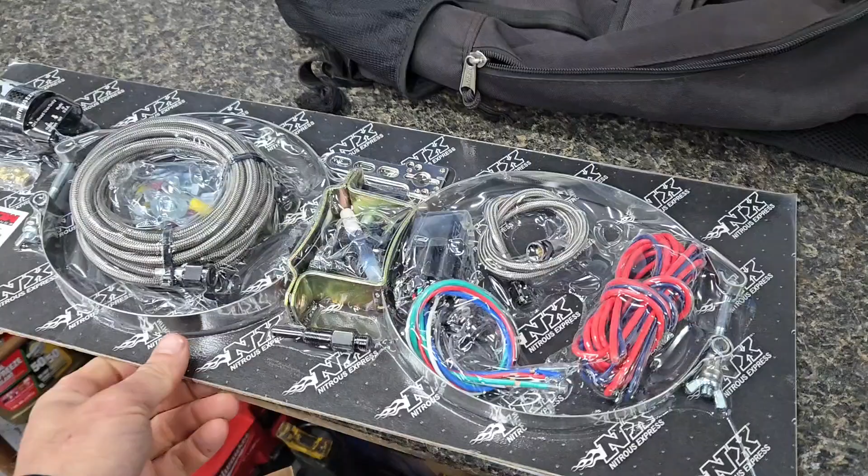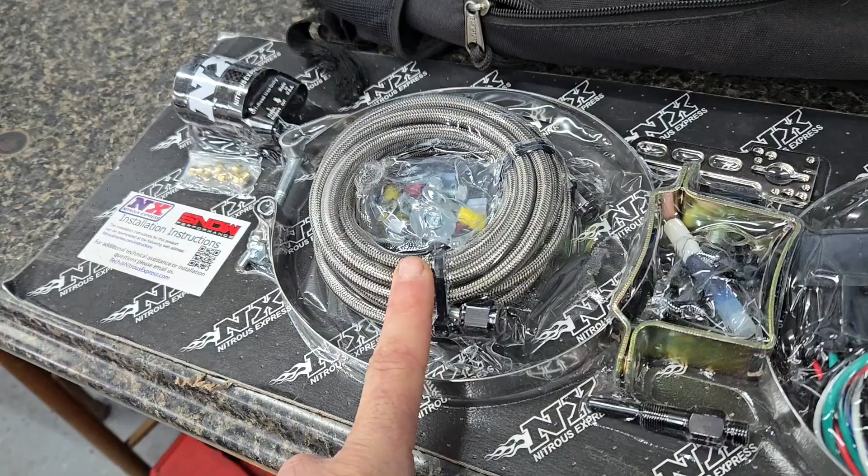All right, got ourselves a little kitty in here. Pretty basic stuff, single nozzle. Hopefully this line is long enough to go to the back of the wagon. We got our jets, nice solenoid here. Ooh, got the billet handle on the bottle. 10-pound bottle, nothing too buck wild.

I wonder if they send these full. Honestly, I don't know. We can crack it open, I guess. I don't think they would send that full, I think it would probably be a hazard. Woo! All right, well, ooh. That's right, all right.

So we got the kit all opened up, and I'm going to go over everything that we are about to do. So we got our line, actually got an arming switch, which I believe this is the wiring for. We got our line from the solenoid to the nozzle. There's our nozzle, and we got our jets.

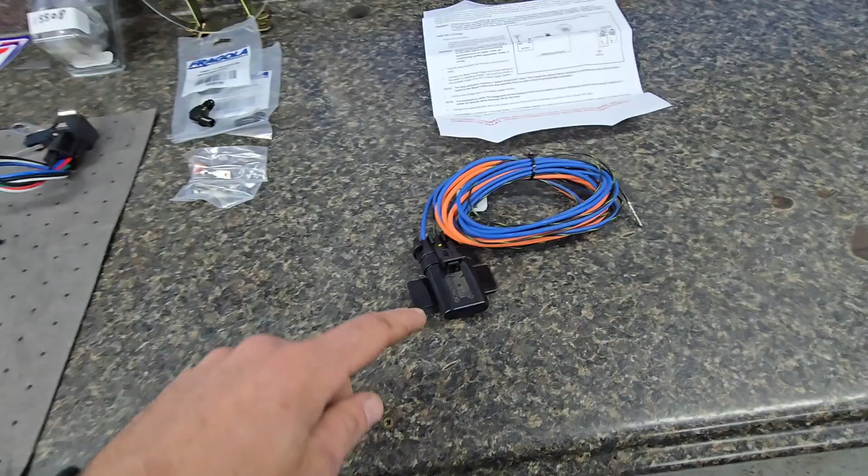So it came with a wide open switch, a bracket for the wide open switch, and then a regular relay. But we are not going to run that deal. What we are going to run is the NOS solid state relay, and that allows us to basically plug right into the Holley, and we can control all of this, everything through the Holley, which I'm actually pretty excited about. Should be pretty fun to do.

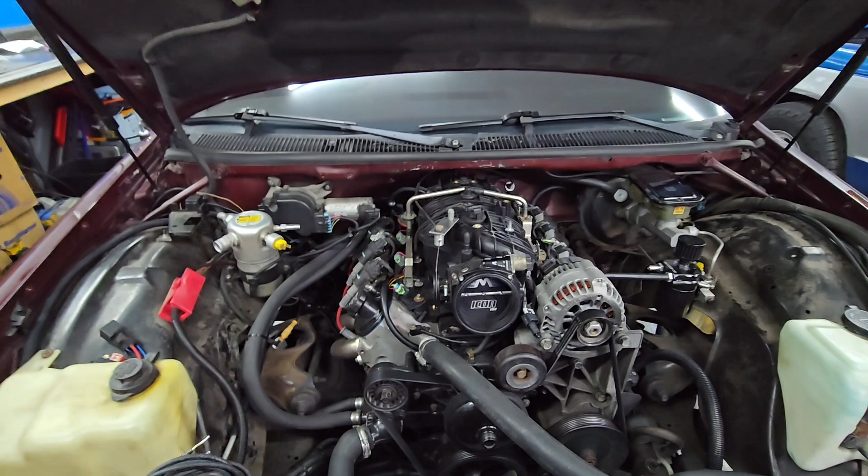So, man, we're going to get started. We need to figure out where we're going to put our solenoid. I was thinking to try to hide it and make it kind of incognito, but I think it's just going to go probably on the fuel rail or something.

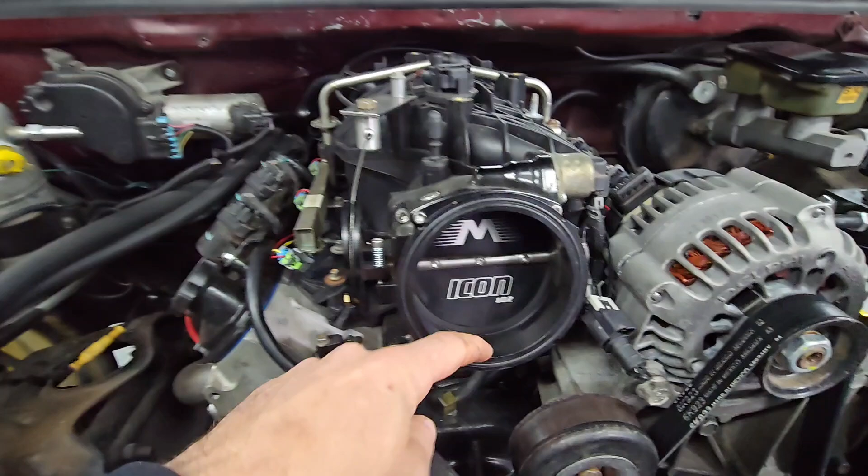Being lame, I do not have a cold air intake tube built yet, or air intake I guess, doesn't have to be cold. But so I think right now what I'm going to do is get real lazy. I'm going to drill a hole into this bolt-on throttle body adapter deal, because I don't think I'll ever need this. And if I do, I can just put a plug in it. But I'm going to drill a hole, tap it for 1/8-inch pipe, and then my nozzle should come underneath with a little stud sticking up, and it'll just spray directly into the throttle body.

So I'm going to mount this thing all up, just running some lines and wires, and it should be pretty easy.

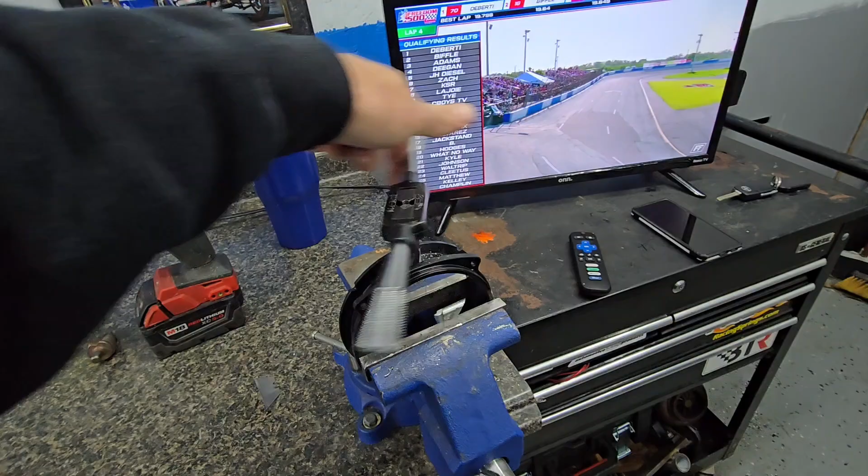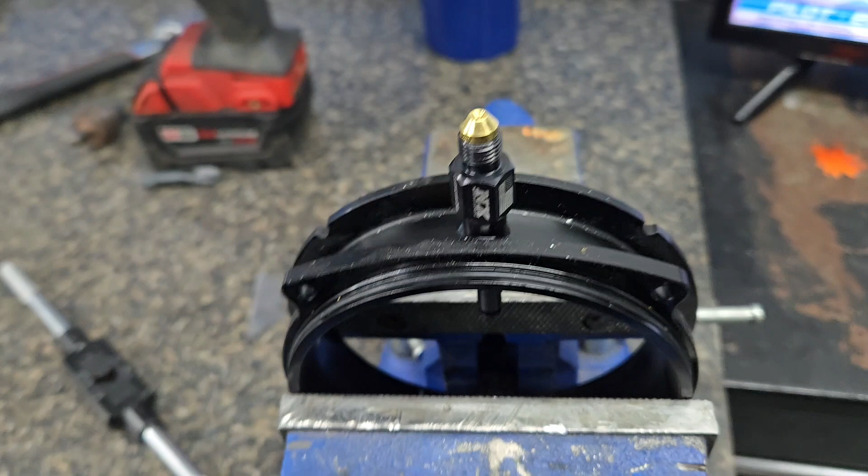And just like that, drilled and tapped the throttle body spacer deal, whatever you want to call that. And I've got the nozzle in there. It's pointing straight back into the throttle body. Let's see if you can see it. There you are. And we've decided to go with the 41 jet, which is a 75 shot for now.

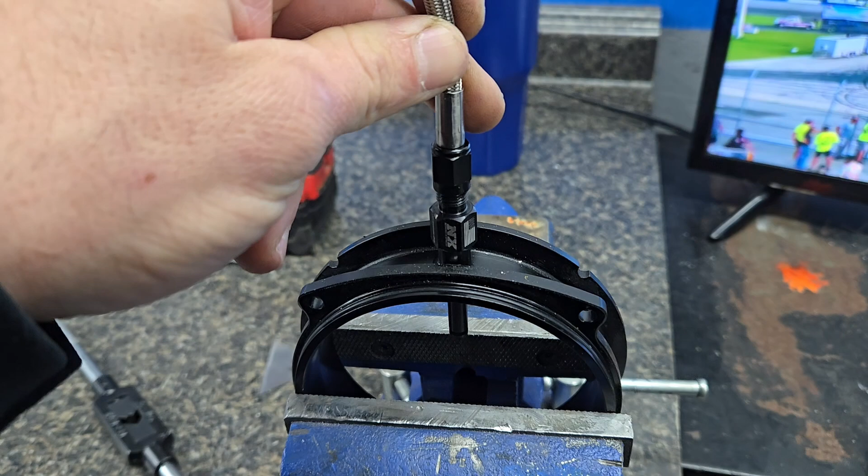I'm not going to get too buck wild on this thing, at least yet, but I just wanted a little something extra. So I'm going to go ahead and just put all this stuff together right now, and it'll be a little easier to do it here on the bench than trying to do it on the car. So I'm going to get this thing on here and put it together.

So it's the next morning after we put some nitrous on, and there's a local Cars and Coffee. She's looking pretty proper, some diesel bros. We felt it to be pretty fitting to park next to the police unit there. Look how good she's looking.

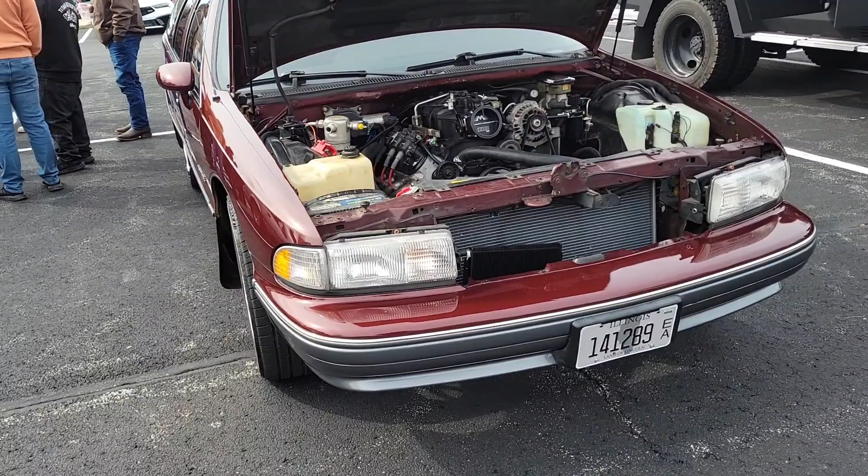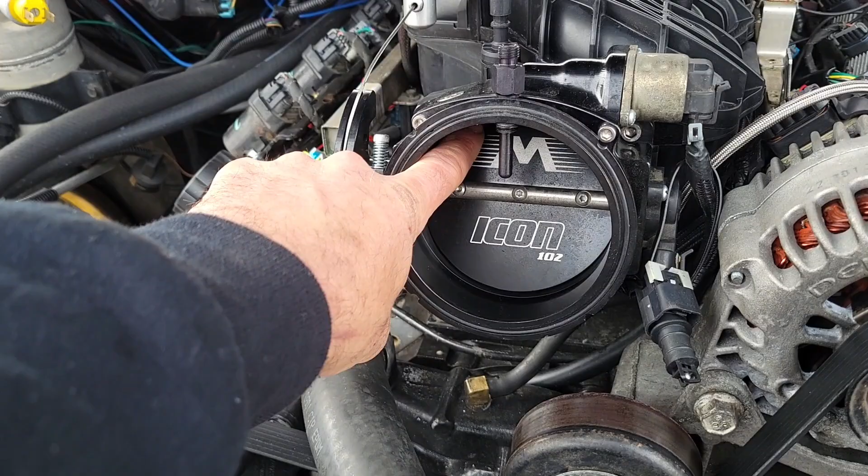So the nitrous kit's almost done. I need one more fitting. We put the nozzle in, and I had it underneath, and I had the line all hidden and everything, but then when I opened the throttle body, it hit the nozzle, so I had to move it. But anyway, it's almost done. Need a 90-degree fitting for the top of here. She's ready to rip. Spray this thing.

All right, so I put the throttle body spacer deal back on. The nozzle was supposed to come from the bottom and up, and it was at first, but then when I opened my throttle blade, it hit it. So I couldn't put it there. So all I did was take the 4 bolts, flip it upside down, bolt it back in. Now it comes from the top.

I had to go get a 90 for this because it stuck straight up into the sky, and we can't have that hitting the hood. So we got a 90 on that deal, which is probably going to be fine. I mean, this does look pretty clean-ish for now, but it was supposed to be all hidden, and this kind of messed things up a little bit.

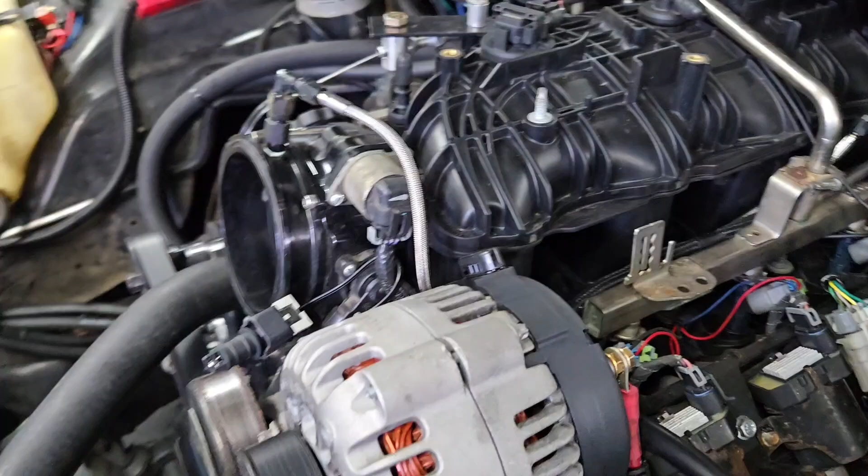No big deal. We do have the solenoid mounted, and right now it's completely lazy with the wires just going up and over the intake. I'm going to hide all that like I do everything else. The line dips down behind it, and then the feed line is somewhat tucked up there, so it's not real ugly. So the feed line is ran. These wires are very loosely ran until I get a little more time to clean it up.

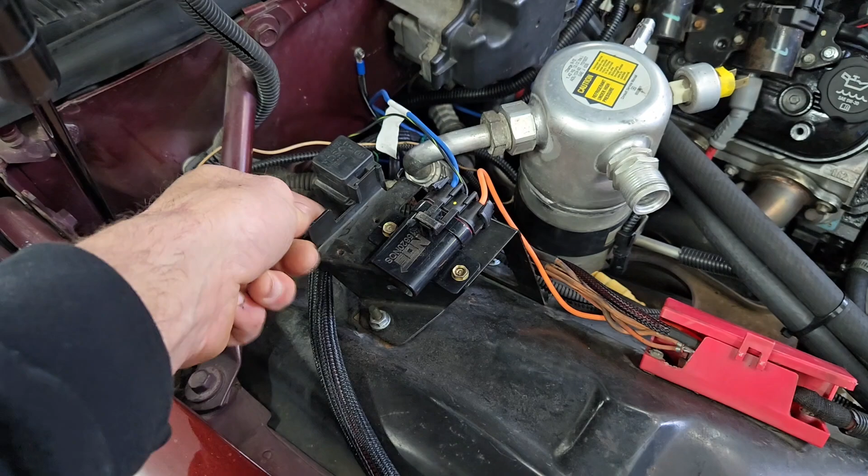But it's mounted up, and oh yeah, the solid state relay is mounted up too, in a perfect little spot on this little factory tab on the inner fender. And I, of course, am going to wire loom all this stuff so it's not orange and blue, because we can't have that. But let's go check out the bottle.

I think that's the coolest part.

Oh yeah, I got some Mickey Thompsons on it at the moment.

All right, I got the bottle mounted up in there. You see it? Looks pretty sweet, huh? No.

Oh, how do you open this deal? You would think it would be in here, right? Nope, not in there. You think it would be in there, right? Nope, not in there. Now, although it does fit in there, I want to keep a spare tire because we just put 24s on this thing, and if I'm out of town or anywhere, I need a spare tire, at least to throw on the front.

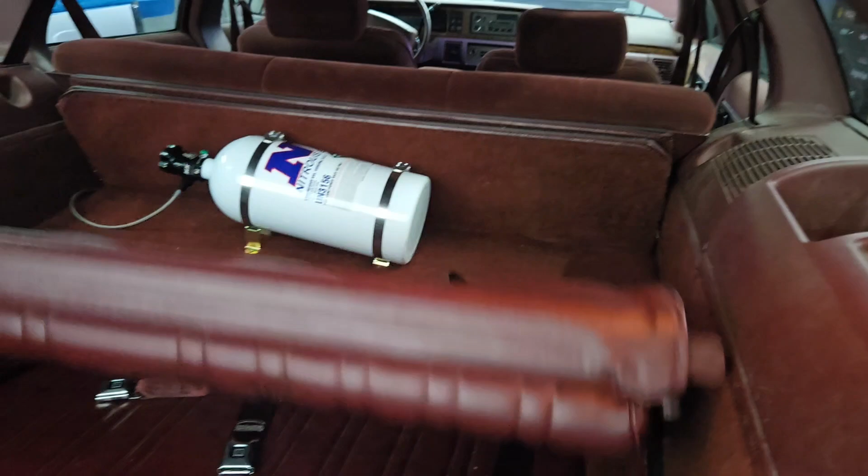That is a cubby space, which I plan to keep to put stuff in there - long road trips, or the kids can put stuff in there. But the nitrous bottle is right there, hidden in plain sight. You pop this little lever. I'm going to pop it, and then... woo! That's nice. It fits perfectly in this little nook in between the seats.

And I can actually access it through here with this handle on this one, or I could push a button on the front seat. So this little button right here, push that guy, and then I get to it from the front. So I can get to it either way.

Pretty sweet, pretty easy to get to, and I'm pretty excited about it because I didn't have to give anything up. I didn't have to cut anything, I didn't have to do nothing. So that guy goes up. Nobody knows. I think you could see it from the top, maybe. Oh yeah, just barely. So I'm pretty happy with that.

And I think on road trips, I don't think I'll be spraying this thing. I'm not going to be spraying the house down on road trips, so I probably will take it out, take the brackets out, in case I want to lay all the seats down to sleep in here overnight. This thing is an 8-foot flat bed, so I don't want to have to rustle around with a nitrous bottle back there. Anywho.

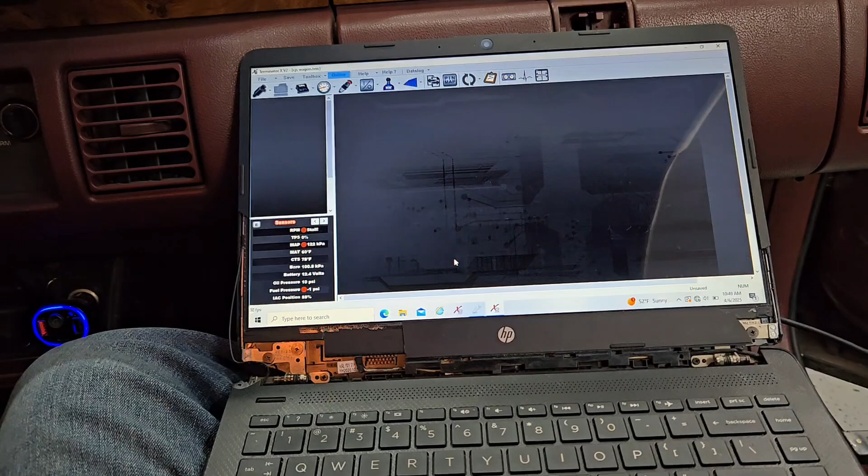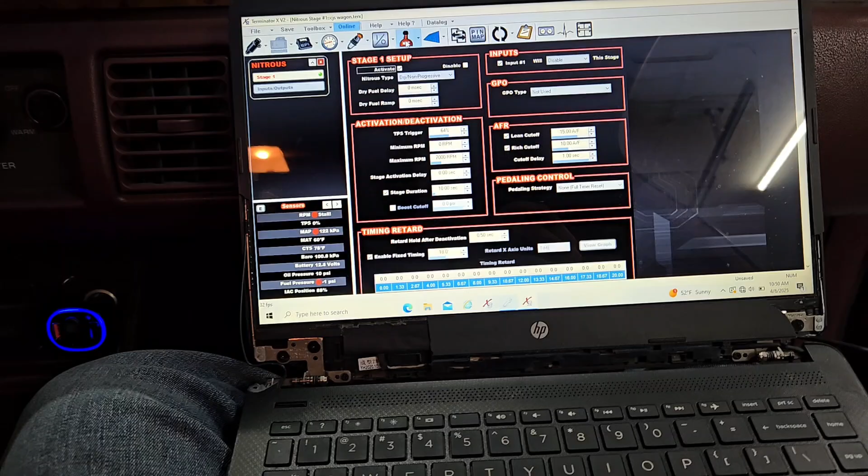Okay, so last night I went through the Holley stuff and I watched a few videos on how to set it up, and I understand all of it for the most part, except I am having somewhat of an issue here. So first things first, I'm just in the car testing to see if the solenoid is working, and here's where we're at so far.

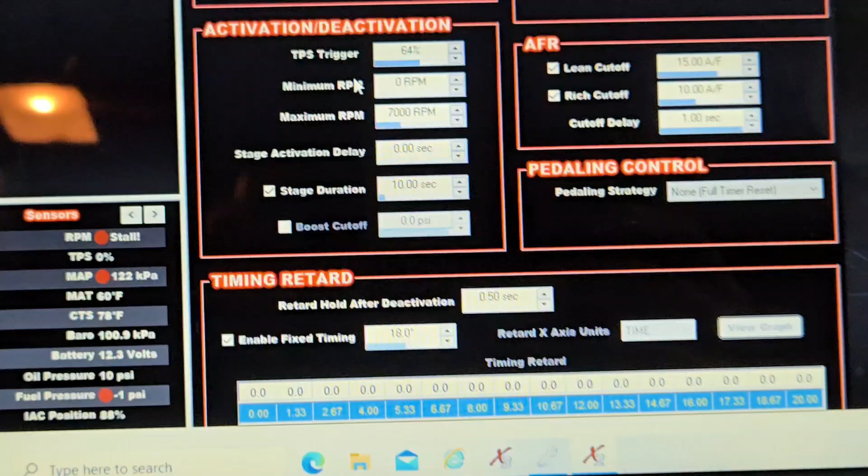In the basic settings, like the pre-settings, this comes as 85% TPS, throttle position, and that's probably about where you want the nitrous to come on at. Except I'm having an issue with it not working past 64%.

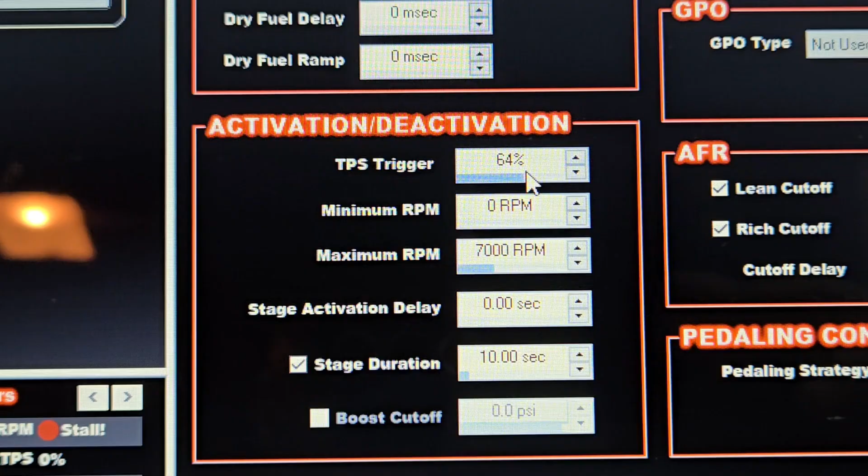So on this minimum RPM deal, I'm just testing here in the garage. That way the vehicle doesn't have to be running. All I have to do is push the gas pedal down past 64%, and it will trigger the relay, which will trigger the solenoid.

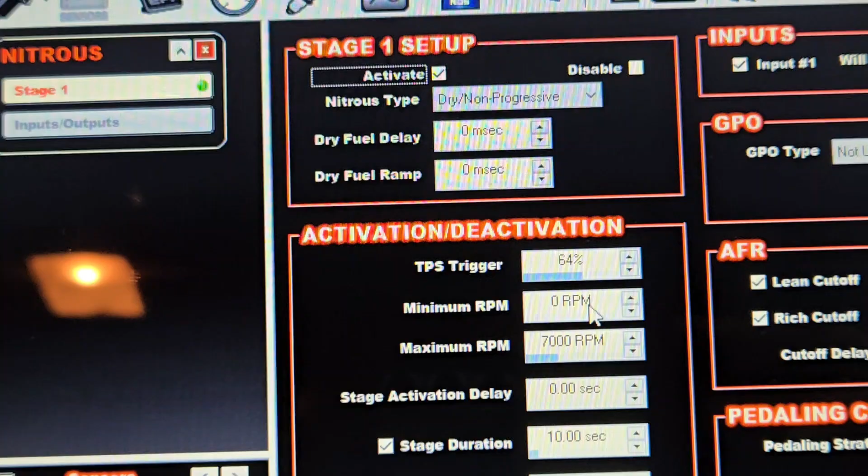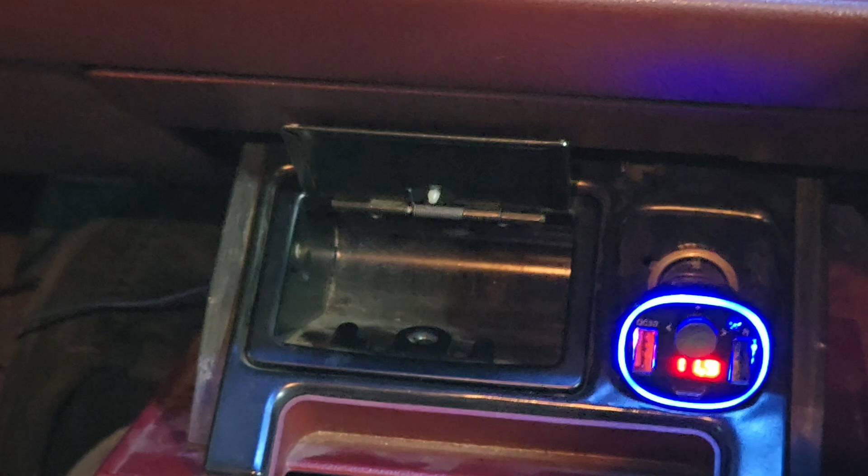Except here's my issue, let's see if I can get this to work. I don't know if you'll be able to hear it in the video or not. Oh yeah, my arming switch, I gotta arm it. We mounted that, can you see it? Probably not, it's tucked up way under there, you can barely really see it at all. Okay, so now that it's armed, sorry, trying to zoom in here.

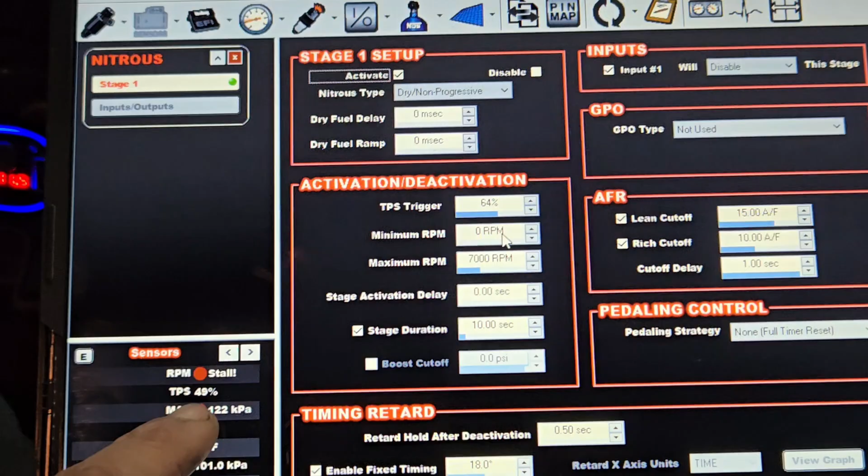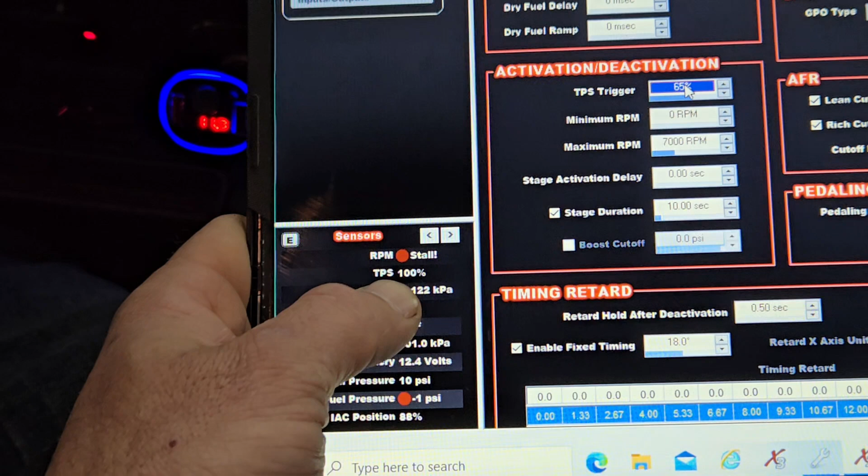You can hear it. And if you watch my throttle percent down here, it clicks on, clicks off, right? Now watch when I go to 65%. All right, 65%, now watch my throttle. No clicking, all the way up to 100%. But when I release the throttle pedal, it clicks when it goes past 65% on the way back down.

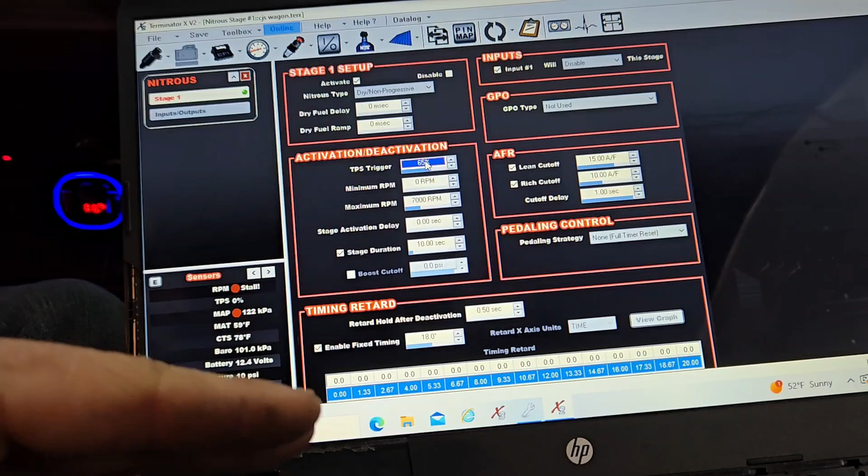I don't know why that is, and it's pretty weird. I'm sure there's a parameter in here that's allowing me or not allowing me to put this where it should be, but I don't know what it is yet. So what it's doing is on the way up, it does not click, but on the way back down, it clicks the solenoid. So I don't really know, but it's kind of scary, honestly, because you don't want it to open up at 65% throttle or 64%. It's probably where peak torque is, and it'll probably blow this thing up, detonate, whatever. I don't know, science and stuff.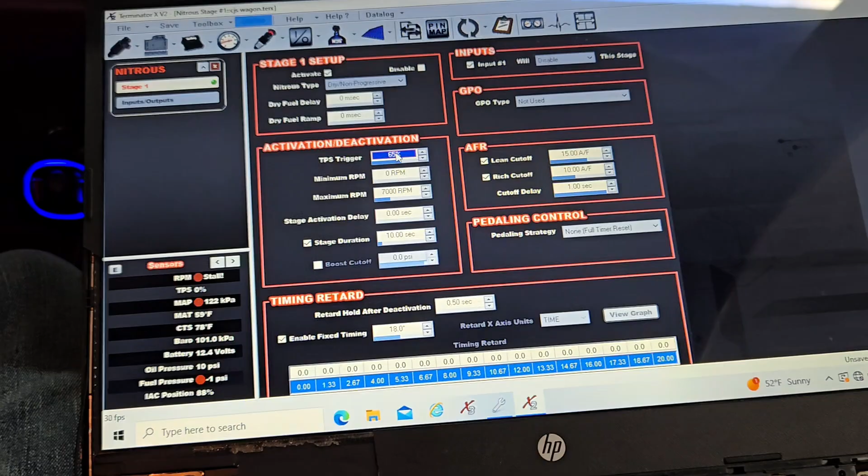But it kind of makes me wish that I would run just the regular wide open switch to activate the nitrous. But if you do use the Holley, you don't need any controller or anything else, it's supposed to do it all for you.

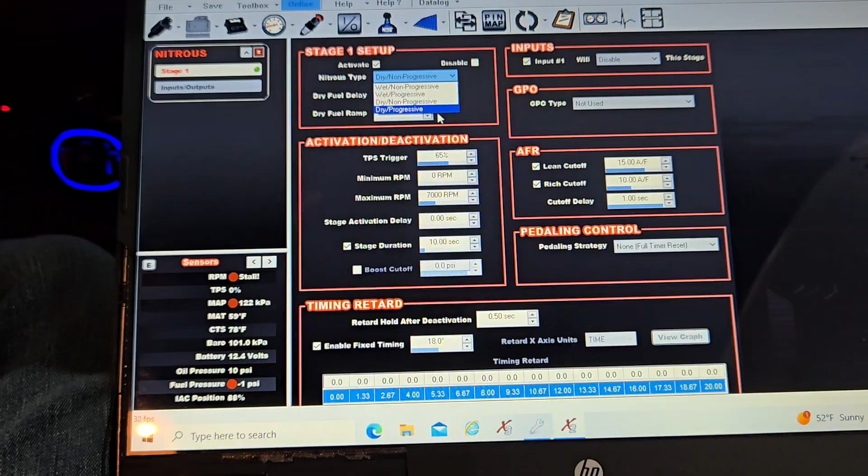So right now I've got it set up for dry, non-progressive, but I can run dry progressive and it will put a progressive ramp in here as I need. So maybe that's something I need to try to experiment with. Maybe I'll try the progressive thing and it will, maybe it'll fix some of the TPS stuff. I know it's something like that, but I haven't figured it out yet. So if you know, let me know, put it in the comments, because I don't know what I'm doing here, but hopefully I can figure it out.

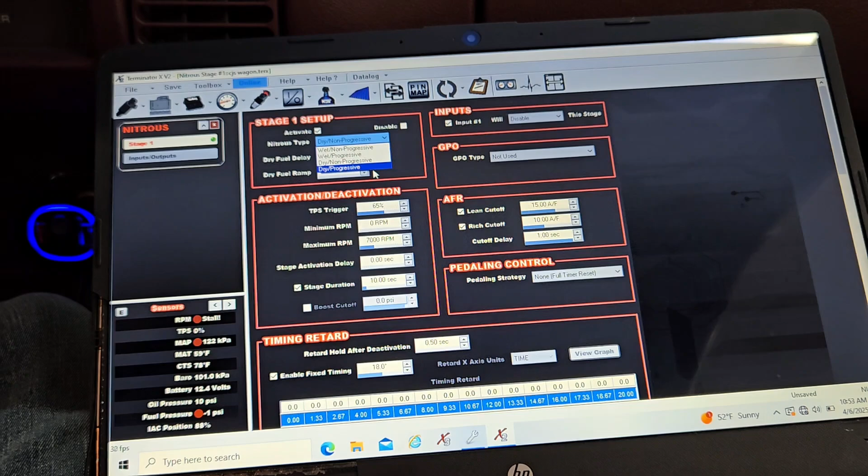So that's about where we are right now with the nitrous stuff. Bottle's full, pretty much the 75 shot jet is in it right now. I just got to go through, tighten up the lines, and this thing's ready to rip.

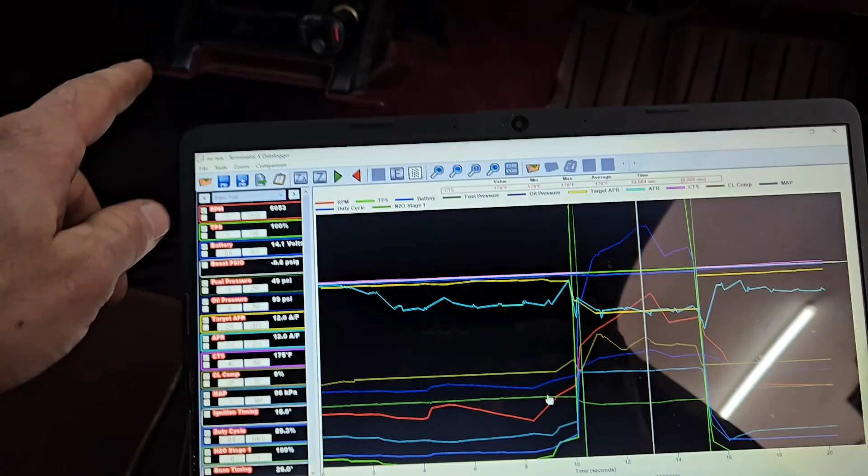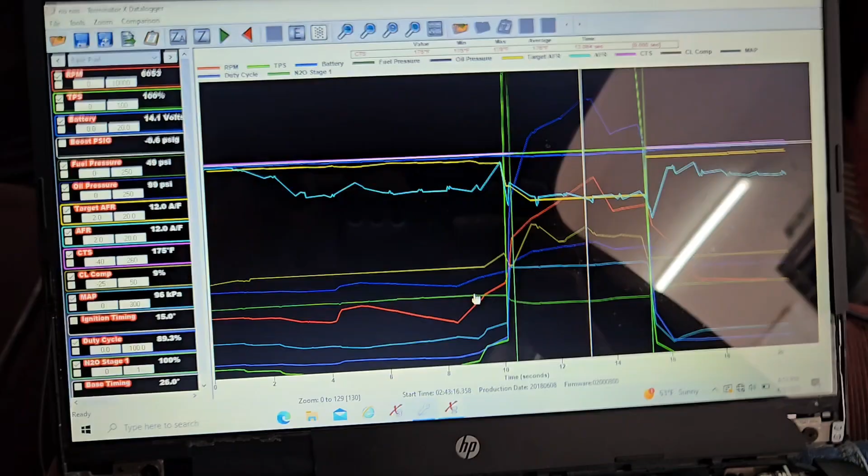All right guys, I think I've got her figured out now. So basically what I went and did was activated the nitrous and then went out and took some data logs. So basically what I'm looking for is to see if the solenoid stays on the entire time that I'm ripping, and it was. So I just put all the settings back to how they were supposed to be.

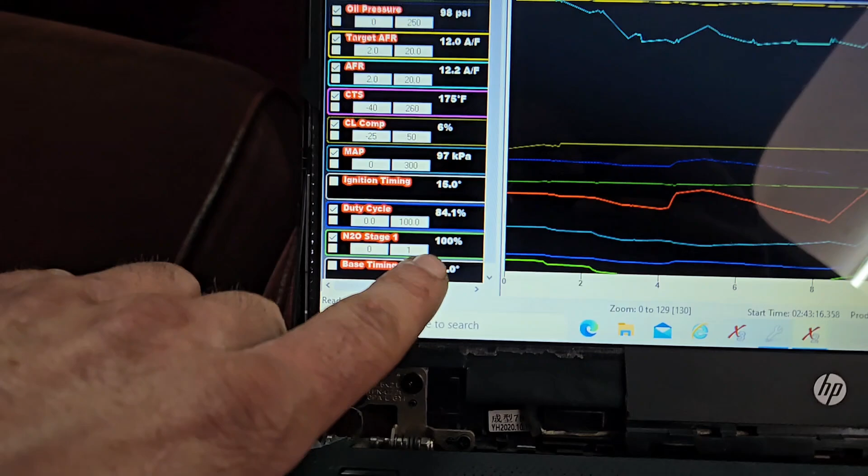And so what I was looking for was ignition timing. I had it locked out 15 degrees and it did it. Throughout the whole run, it was locked out 15 degrees. And then down here on the nitrous, it stayed on 100% throughout the whole run. Over at this point, it was 100% throttle. So now I can put all the timing back in it because I know that works.

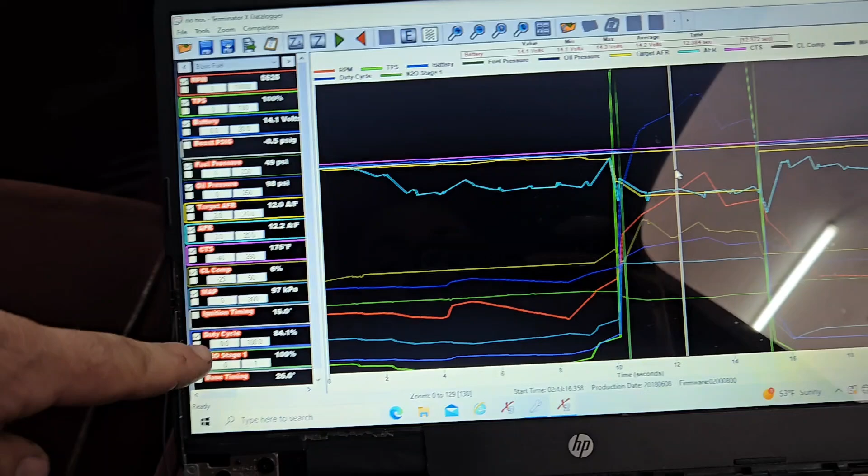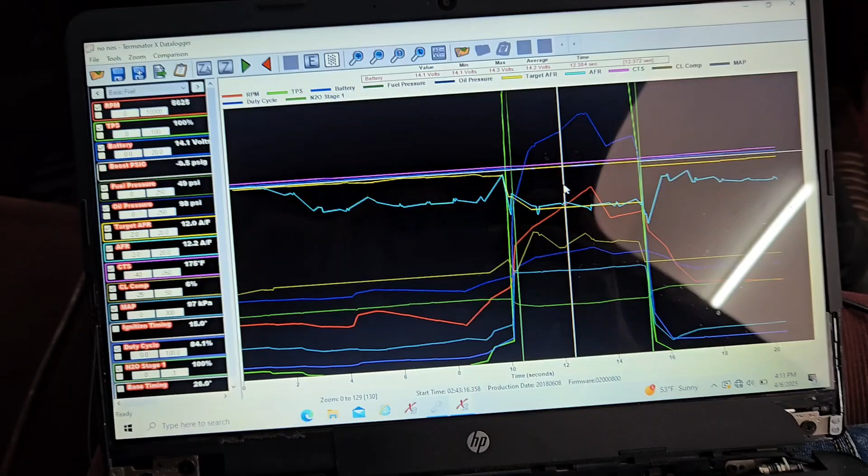Oh, and I also did the fuel. So the fuel, it adds a little bit of fuel, and it was adding some fuel because the duty cycle went up. Now I'm at 84% duty cycle, so these injectors hopefully are enough for a 75 shot, but we'll see. So I am pretty much ready, I'm pretty much ready to turn the bottle on and go make some hits. I'm pretty nervous about it.

75 shot, pretty small. I just wanted to make sure that all my ducks are in a row. I don't want to go and blow the intake off this thing or blow it up because of a weird timing percentage parameter that I wasn't aware of. So I think we're all good to go. I'm probably just going to turn the bottle on, take some data logs, and see what happens. Hopefully this thing rips. I bet it will. So let's go try.

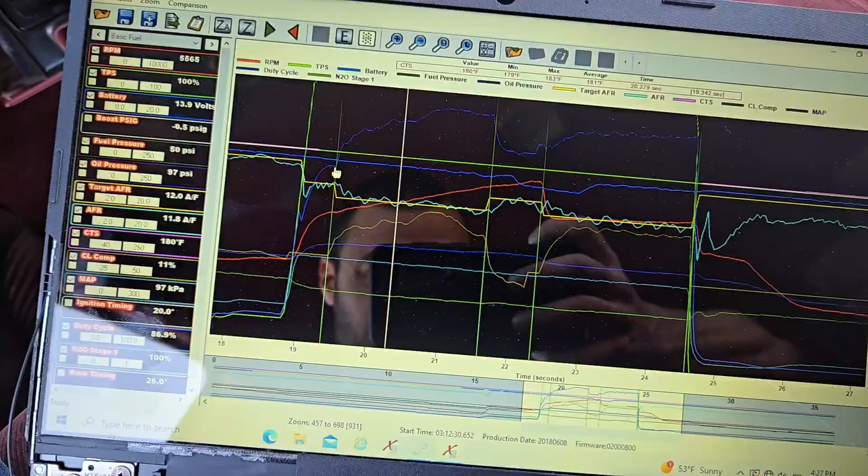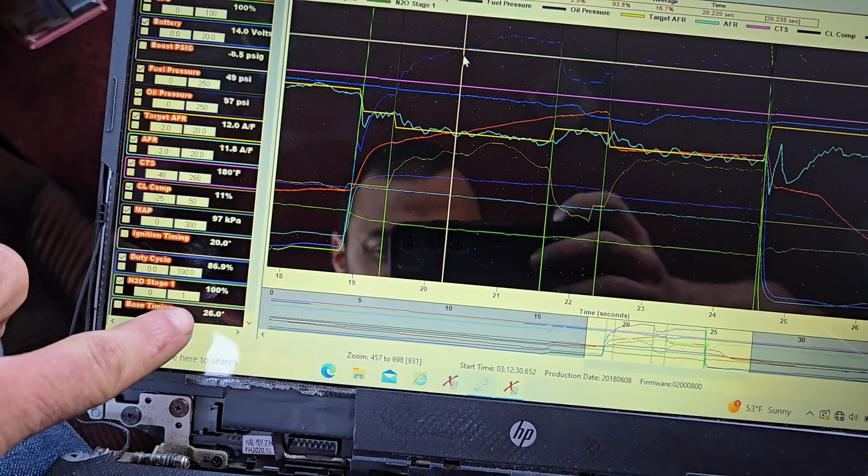Alright guys, pulled over on the side of the road just checking this data log. So if you look right here, this blue line shoots pretty much straight up. That's when the nitrous kicks on and engages. And if I just click a random spot over here, the ignition timing is doing what it's supposed to be doing. So base timing is 26, but I commanded it to only do 20 degrees of timing.

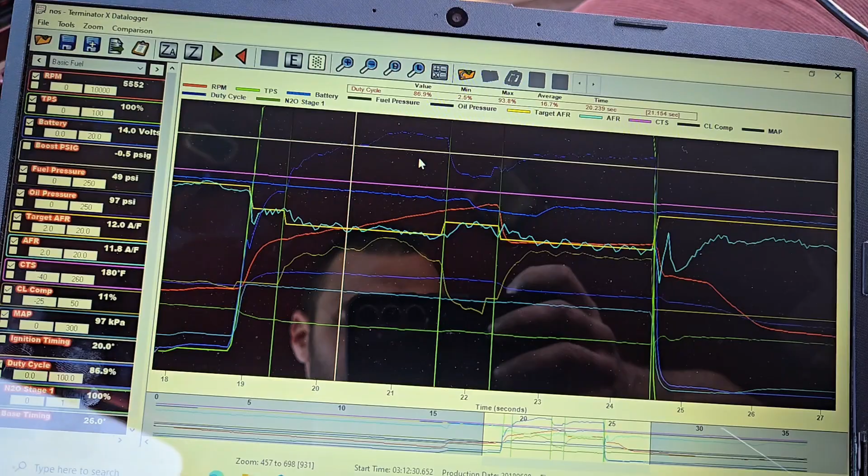I wanted this thing to be kind of safe, and I think we did it. Now, down here you see the nitrous is 100% on, but if I scroll over, it turns itself off right around the 1-2 shift.

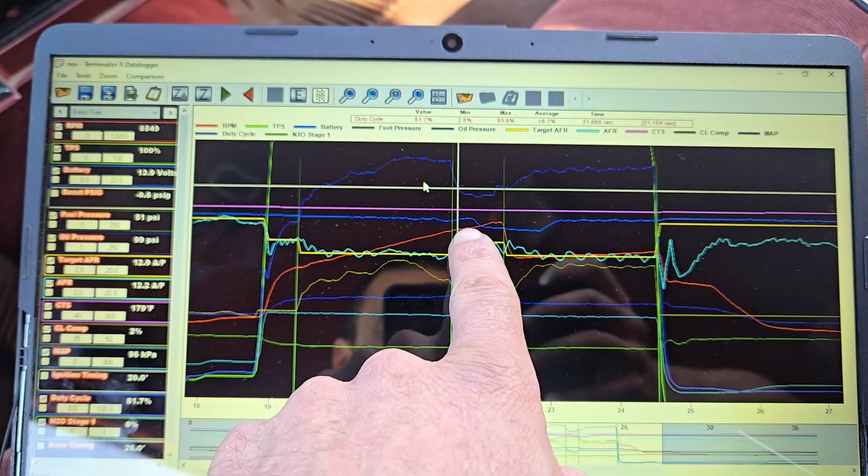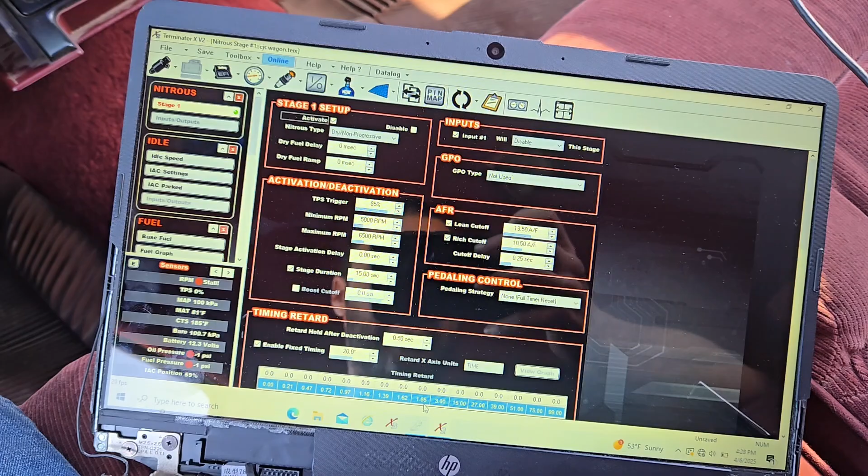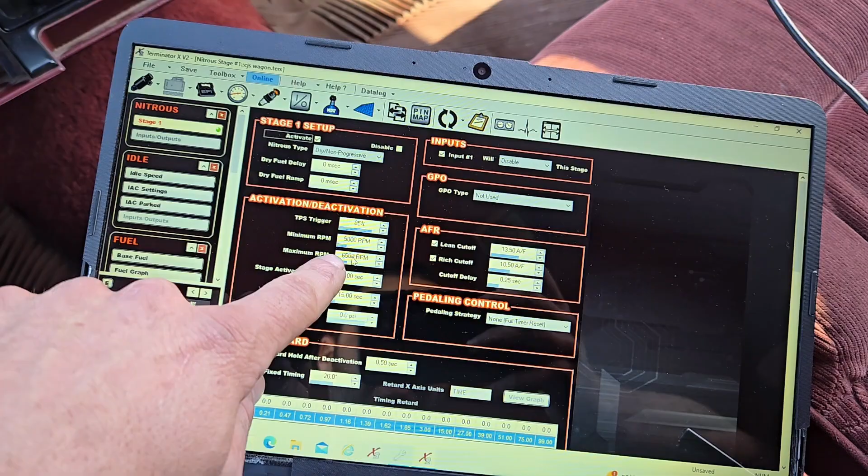So after looking at that, I figured out that - keeps going out of focus, sorry - I figured out is because it hit 6,500 RPM, which right here is our max RPM. So we need to probably bump that up to 7,000, and then that nitrous will stay on the whole time.

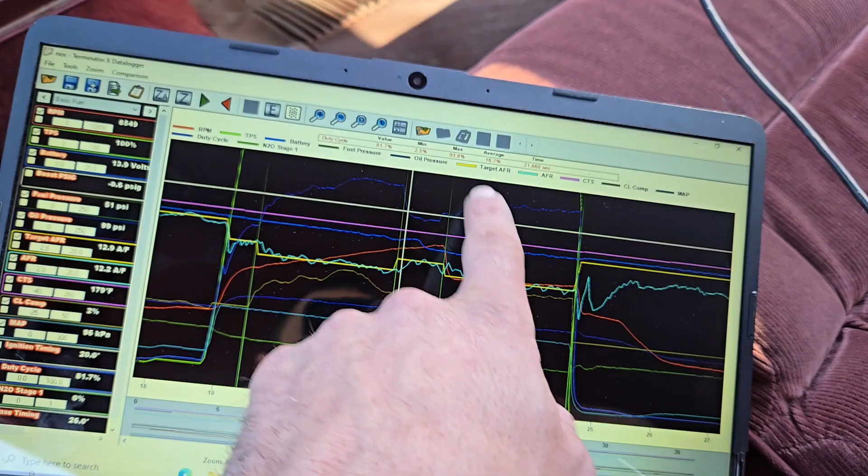But it worked and it ripped. Nitrous did come back on somewhere in second gear, so it kind of did a bunch of stuff right there. Nitrous came off, the timing went back up 6 degrees, and then nitrous kicked back on, pulled the timing back down. So the power was kind of just jumping all over the place.

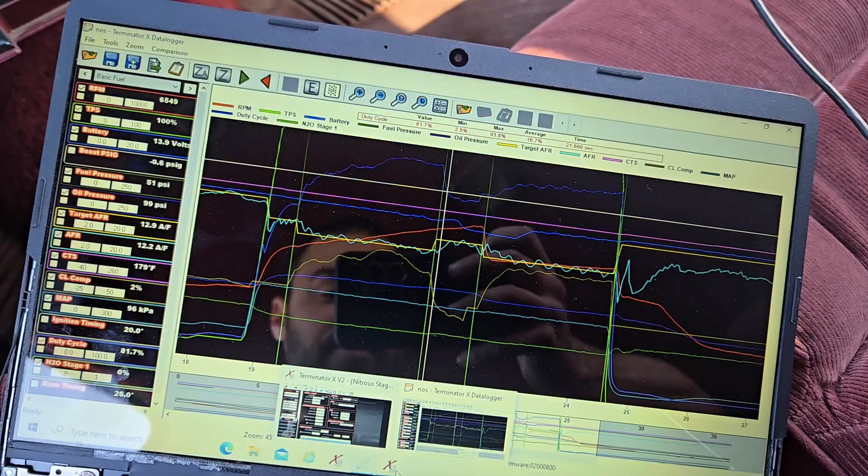Man, just a little bit of fudging on these numbers and this thing's gonna be a ripper. So we'll probably bump this thing up to a 100, 125 shot later on, or put a little bit of timing in it. I think we're relatively safe on timing. This thing does have a little bit of 110 race gas in it that I got at the gas station.

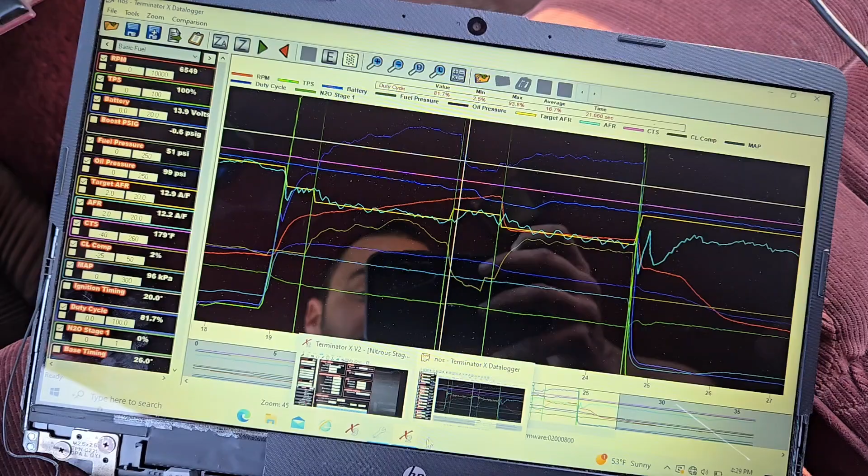All right, well, I'm gonna keep tinkering with it. Probably gonna hit 1 or 2 more rips on the way home. All right, so I made my changes. I'm gonna hit 1 or 2 more licks on the way home.

It almost did a wheelie on the street. It did cut out, which I'm pretty sure I'm out of gas, so I'll stop doing what I'm doing. But it hit hard. All right, I'm pretty sure I hit fuel cuts. Station wagons are not supposed to be this fast. I can't wait to get back out and mess with some people. All right, I'll put some gas in this thing and we'll try it again a little bit later on.

All right guys, so it's been a couple of days since we made those first few nitrous rips with the wagon, and what we learned was that 75 shot pulling 6 degrees of timing was really like no difference than having the regular timing put in it and no nitrous. There's not a huge difference there. I took so much power out of it with the timing that there wasn't like a big difference. Now it did rip, and it ripped harder, but it wasn't very much.

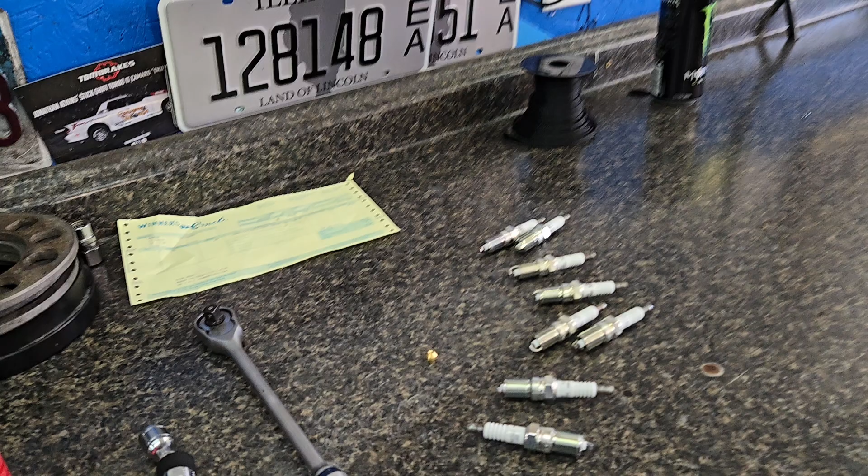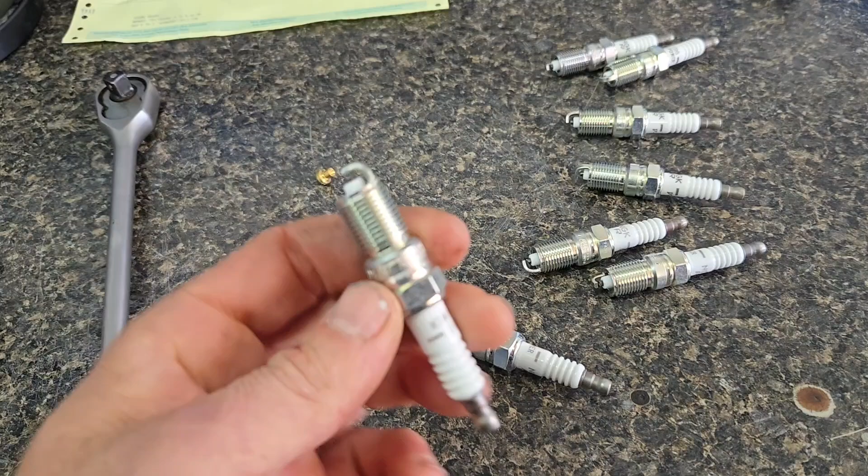So we're gonna bump it up a little bit. We're gonna move up to 100 shot. I might even put the 125 shot in there, so I haven't decided that, but we also need to make sure that we put some new plugs in this thing. In the car right now is a TR5, and I didn't gap them at all. I didn't plan on running nitrous this early, but I am. Here we are. So we're gonna gap these plugs probably around 25, 26 thousandths.

Throw these things in, nitrous jet in, and Devin was riding around with me and looked at the tune. He thinks the tune is way more than safe. So we're gonna throw those in and then go make a few more rips.

Now last weekend we went out cruising, and I made some NA rips before I put the nitrous on. So I raced John, my buddy John, in his Whippled F-150. Now we're kind of comparing apples to oranges here. It held its own for what it was, but we definitely need to get a little closer. So I'll throw that video in here real quick.

All right, 1, 2, 3. So he pulled me hard, of course.

They're apples to oranges, but with this 100 shot and a little bit of race gas and a different tire, we're gonna roll around with these Pro Bracket radials with a 26-inch tall, which is gonna help my gearing issue a little bit. We're gonna try to get a little closer to John. Maybe we can meet up this weekend and I'll post an aftermath video of how much closer I am to him. That's the only thing I have to judge off of, like how fast it's getting. All right, we're gonna throw this stuff in here, and then I'll turn the camera back on once we're ready and making some more rips.

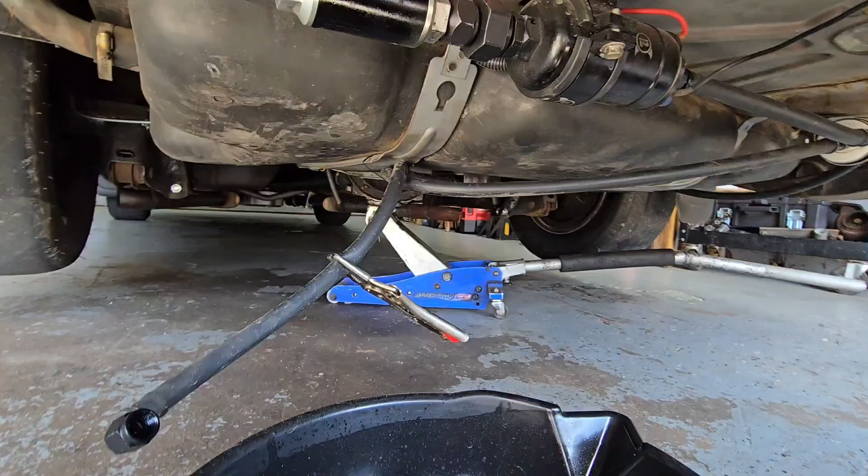All right, well, that didn't work. Stand by. So the good thing about having really cheap rubber hoses is you could just clamp it off with some Vise-Grips. But let's check out this pre-filter.

So when I drilled the hole in the plastic gas tank for the diesel sump, it had plastic shavings everywhere, and I knew this was going to be a problem. I've already cleaned this filter like 3 times, but I just drove this car an hour away today and then got back home a little bit ago. Oh, shoot.

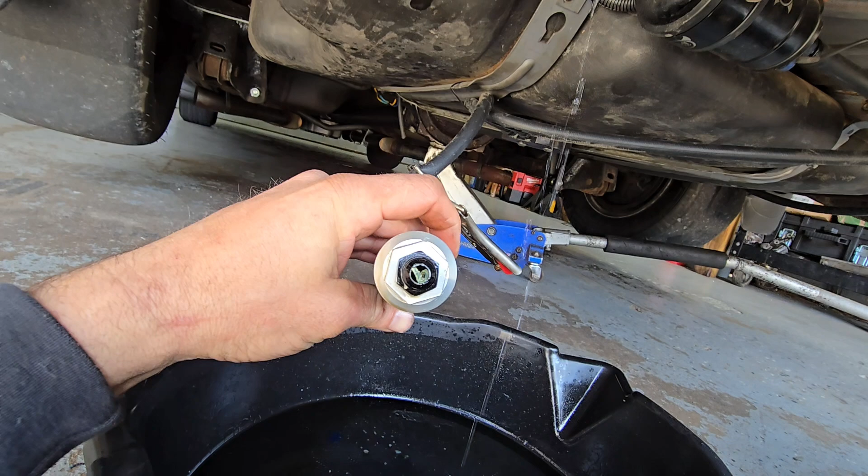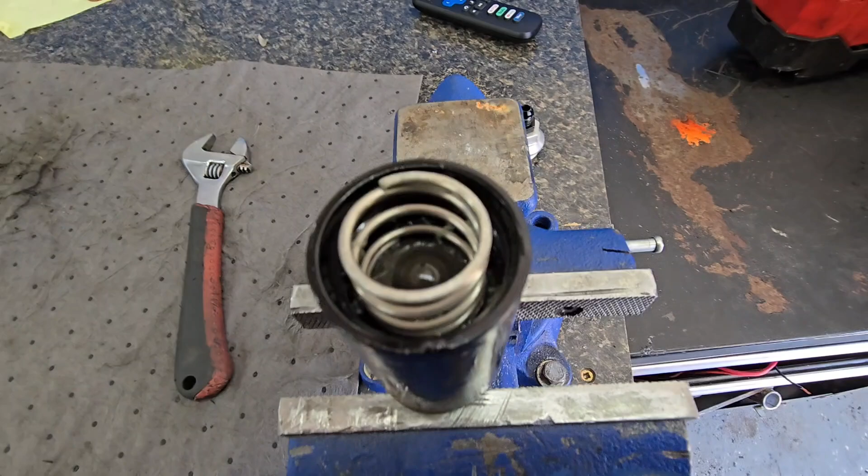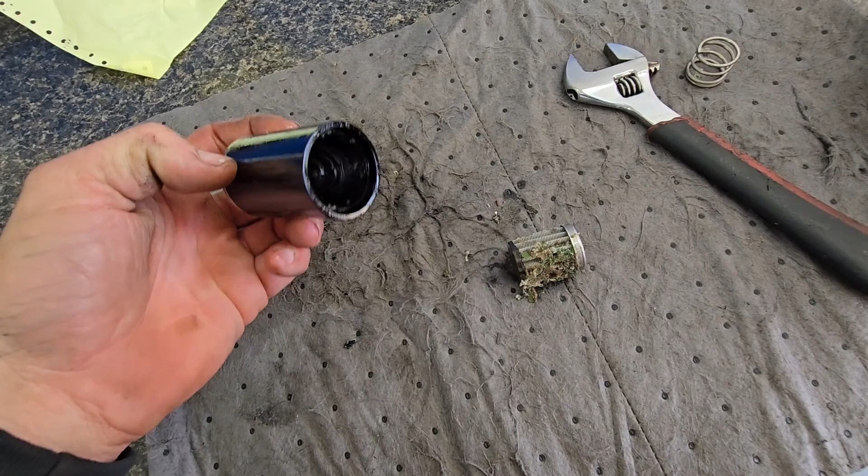Alrighty, so I'm assuming there's probably still some stuff in the tank. Look at that, that's a pretty good sign, kind of. So we'll take this thing apart, get it cleaned out, and I bet that was our issue. Oh yeah, see all that stuff? Yep, that'll do it. All right, well I thought I got most of this last time, so apparently not. Alrighty, well I'll clean this all up, put it back together.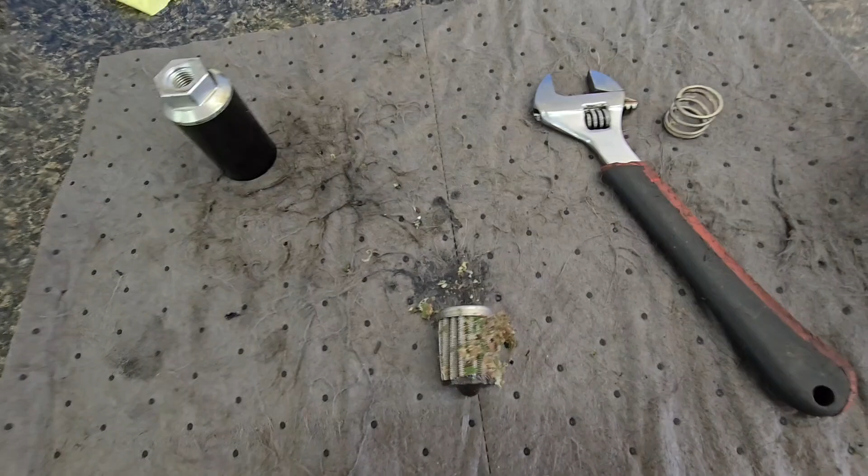Alright guys, so we cleaned that fuel filter out. We're gonna just make some NA rips real quick, make sure everything is kosher and our fuel pressure doesn't drop. We were dropping fuel pressure pretty hard, so that was all the issue. But we're gonna rip on this thing, make sure it's safe, and then we'll try the bottle again if everything checks out.

Pretty good, it's still cutting out at the very top just a little, pulling some fuel back out. Let's clear this table out.

Oh, there's a cop right there. Behind you or in front of you?

It hit 32. Okay, so we're still dropping pressure. But it pulled more - well, I added some again. Alright, we're running out of fuel pump, not much we can do about that. Fuel system, fuel delivery problem of some sort, which is a huge bummer because I was really hoping to let this thing rip and do some racing in it tonight.

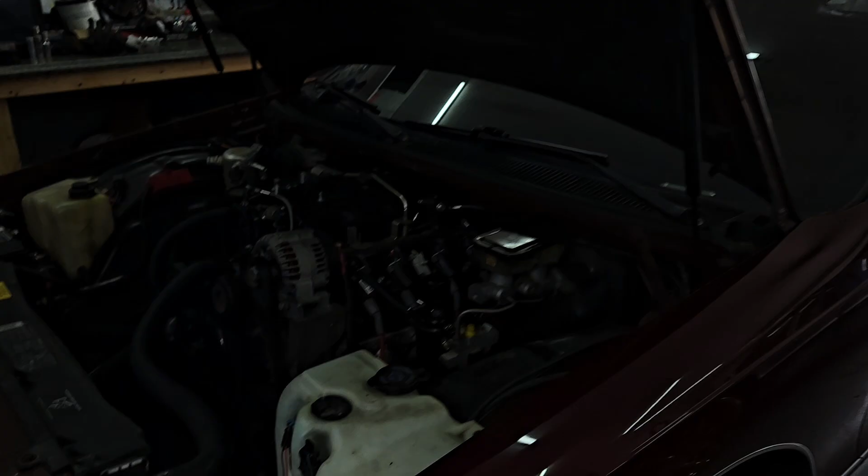But funny enough, I opened the hood up to show you guys I'm going to build a cold air intake, and I started looking at the nitrous nozzle. Check this out. So I'm checking out the nozzle, and it's pretty clean up here. Been rubbing on the hood right there - oh sorry, right there. And I'm like, alright, well, you know, I'm going to move this anyway. This whole deal's coming off. It was temporary. But look at the dang nozzle jet.

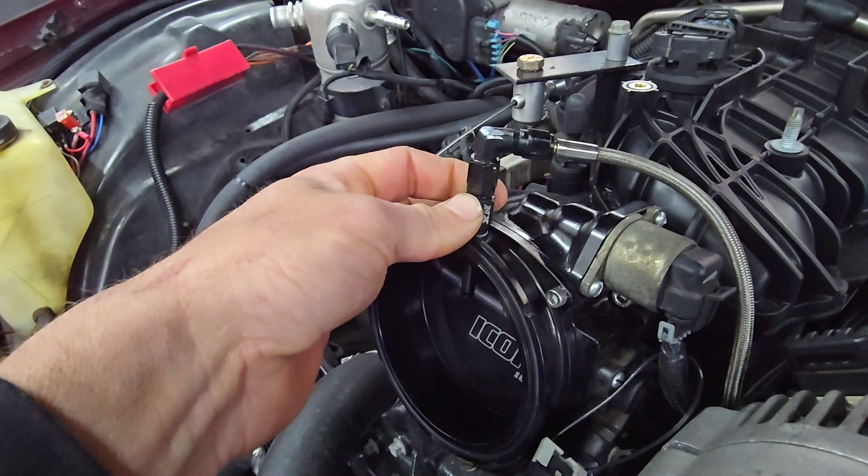It somehow... it stripped the threads out on that and it turned itself, so the nitrous has just been shooting out. Now, yes, I'm sure 70% is going to make its way back into the throttle body - this thing is sucking in a lot - but obviously that's not ideal.

So I did race the Whipple F-150 again. We were freaking door to door, and all said and done, he inched out on me like this much. I didn't get a video of it - complete slacker, I'm sorry - but to have this thing door to door with a Whipple F-150 was pretty amazing. He was stoked, I was stoked. It was a fun race.

I'm gonna get some more racing videos soon. It's just really hard to do - I'm shifting on the tree, steering, and it's kind of hard to do. So, but I'm gonna work on that.

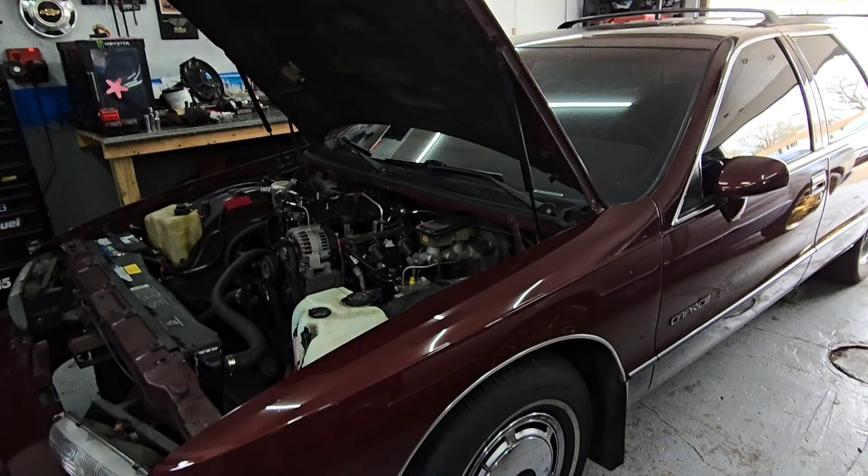So also I wanted to talk to you about the wheels and tires. I am gonna put the gold wheels and tires back on, but I kind of have something else in the works that I'm gonna be working on this week. So there's that - now they are gonna go back on the wagon, but I got a different project that I'm working on that I kind of need them for something else right now.